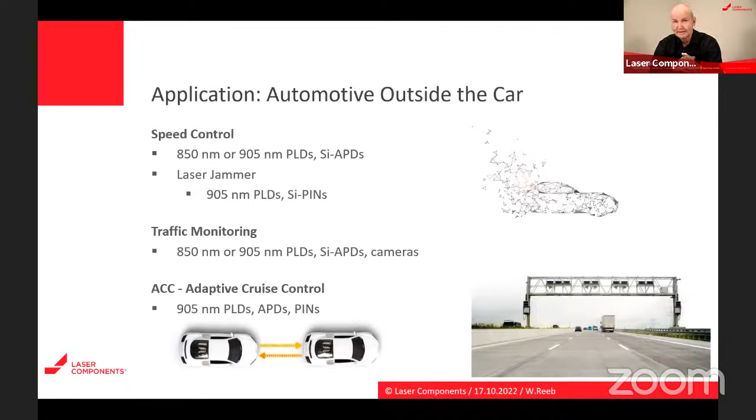If we look into a car, we see that there are many different sensors and technologies, because unfortunately there's no perfect sensor that optimally performs all measuring tasks. Cameras, for example, are good for color vision, identifying other road users, lane markers, and traffic signs.

Ultrasonic is used for parking assistance and short distance measurements. Radar is used for speed and obstacle detection. And LiDAR has 3D capability and the ability to function in unfavorable weather conditions like darkness, a big difference from cameras.

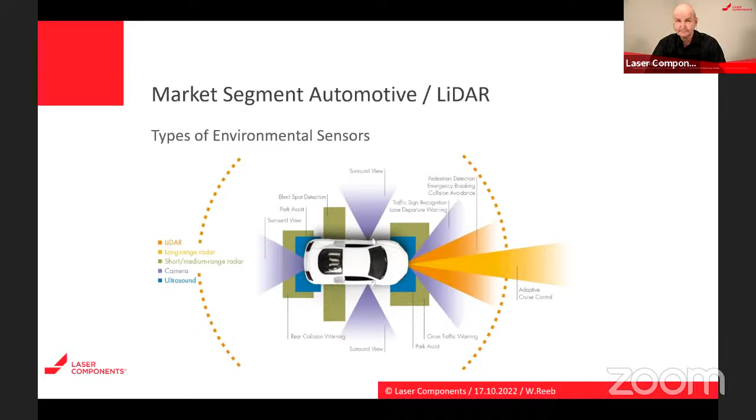Solid-state LiDAR is a code name to describe LiDAR which are not using conventional motors, but semiconductor solutions to scan or steer light through a scene. The emitter and the detector are essentially the same, but the rotating mirror gets replaced by a MEMS.

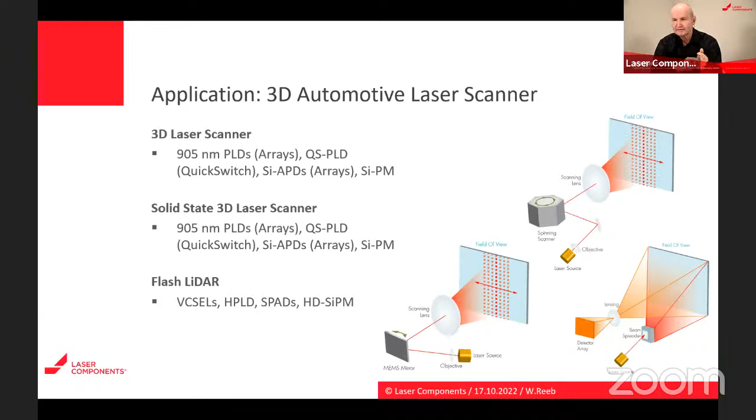Flash LiDAR is different. It illuminates the entire field of view at once, and the photodetector array captures the return of the entire field of view at once. So flash is mechanically and optically simple, and potentially cheaper as there is no need for a beam steering mechanism, but the requirements for the emitter and detectors are more demanding.

Okay, I have to speed up.

Other applications: the head-up display, for example, is an augmented reality display that provides a safe driving environment by showing information derived from vehicle sensor data.

Anti-fatigue driving detection system: it's a matter of traffic safety, preventing drivers from drowsiness. It's a kind of driver monitoring system based on facial 3D imaging recognition and movement detection, such as eye closing.

Laser headlight: on the topic of continuous improvement in the automotive industry, headlight technologies from halogen, xenon, and LEDs to now doubtless laser is one of the favorites to improve energy conversion, efficiency, and brightness.

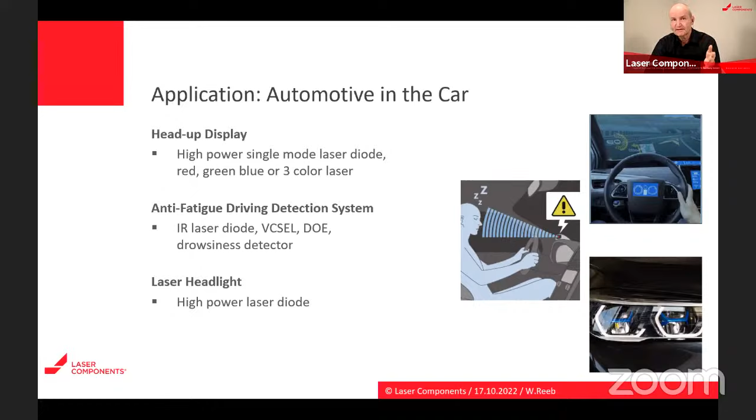Air quality monitoring system: the so-called PM2.5 sensor uses laser scattering to detect suspended particles in the air. Maybe the next step could be air purification using UVC LEDs in the future.

Laser indicator or anti-collision brake warning light. An anti-collision brake warning light increases visibility at the rear end of the vehicle, warning following drivers not to get too close so that traffic accidents can be avoided.

Finally, the Rolls-Royce star roof. I have no picture here, so you really have to Google it. Looks fantastic, but it's more likely Photonics entertainment in the car.

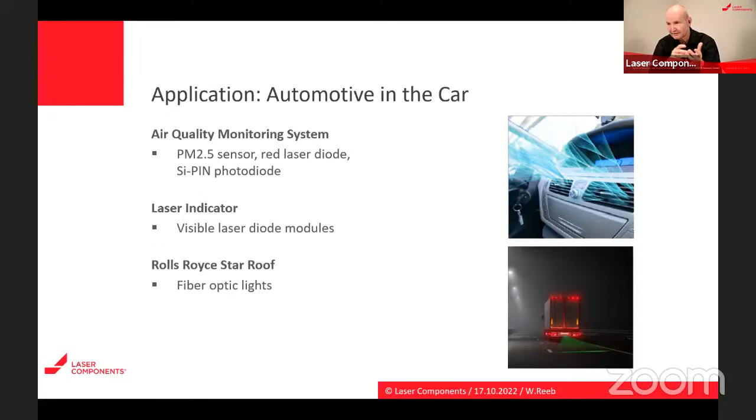So I'll do a very short summary. Photonics already plays an important role in mobility and will definitely play more in the future. Even if there are some nice-to-have applications, Photonics is indispensable for safety and health reasons. LiDAR sensors are important for safety and, in the future, for autonomous driving.

If you have any questions offline after this event, please contact me directly. Otherwise, thank you for your attention. I hope I made it just in time, Antonio.

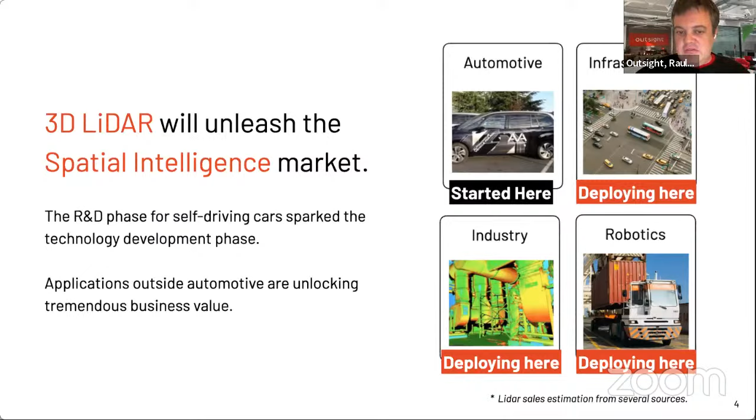The problem with all these industries, unlike the self-driving car, is that it's very complex for normal engineers to use LiDAR data. There are many reasons for that - I'm not getting into detail on each one, but there are many aspects to the complexity for a normal engineer to use LiDAR. For example, you cannot really use image processing techniques for LiDAR, it's a very different kind of data. There is no standard - there are almost 80 different manufacturers of LiDAR, and each one is using their own solution. It's really what is today preventing deployment at scale, not the price and performance anymore.

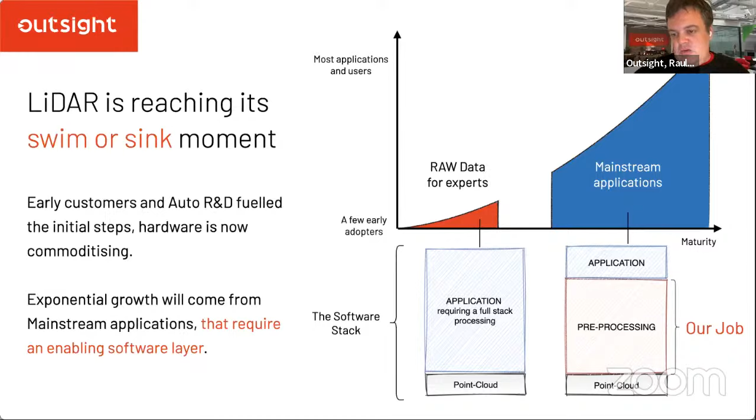So that's what we are doing - helping the market evolve from an early stage phase where everyone was doing everything, to the mainstream situation where there is hardware, but also specific software that helps build applications very easily. This is what we are doing, making it very easy to build applications from LiDAR. That means 3 things. First, we are abstracting the complexity of the hardware, combining different heterogeneous situations and manufacturers and bringing a standard output. Second, we are processing this data, doing the heavy lifting - object detection, tracking, SLAM, volume computation, etc. And third, as a consequence of the previous one, the narrowband output is something you can easily use in any application compared to the raw data, which is a massive amount of 3D data that is hard to process.

For example, in an airport situation, these are the steps you need to do, at least, to get to this point. First, making clustering and segmentation of the objects, tracking them, and then providing a higher abstraction level. If you are asking a customer to go from the bottom, which is the point cloud, and build their top abstracted situation, which is a dashboard, you can see there are many steps that only some customers are able and willing to do, whereas the value of the 3D data is becoming more and more obvious for many people.

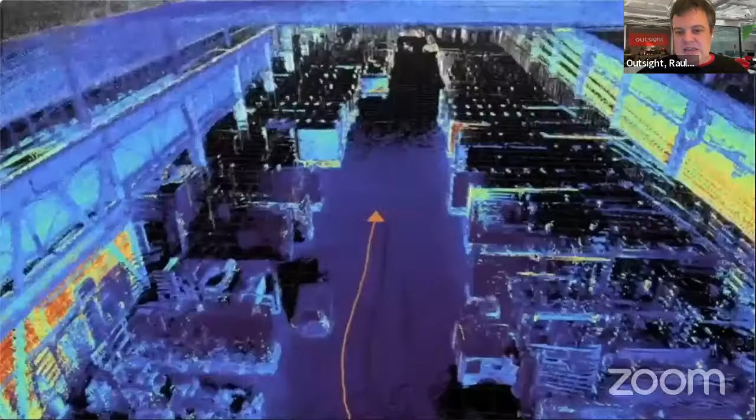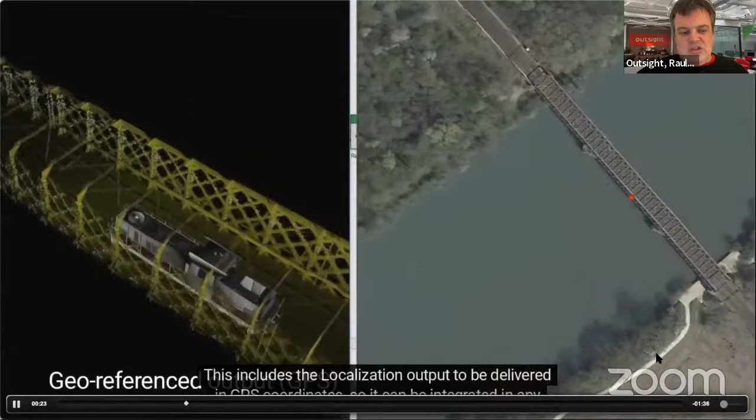So this is an illustration of what we mean. This is raw data, and this is already processed data in real time. Remember, this is done at the same time that the data is acquired, at some 20 Hertz, more or less. And this gives you a quick overview of the main features, which are localization and mapping, fusing with GPS data or similar, so you can integrate with other platforms such as Google.

Perception and object tracking, including static and moving objects. You can use this for different use cases, of course automotive and self-driving cars, but there are many other use cases like speed law enforcement, city inventory, and many other situations where you would like to have not only a map, but also a dynamic understanding.

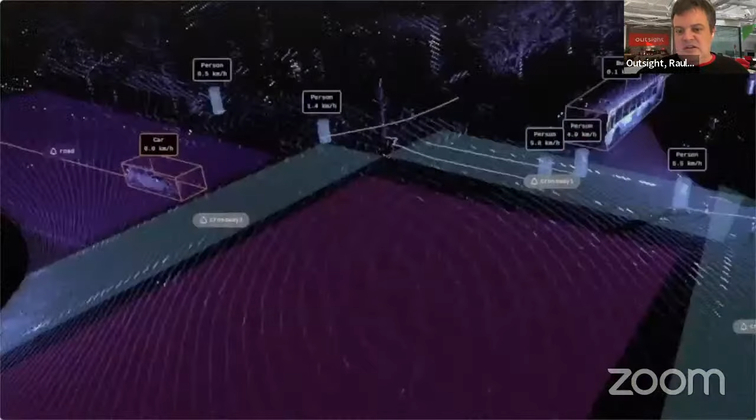A very powerful and strong trend we are seeing is smart cities and intelligent intersections, where we are tracking bicycles, pedestrians, vehicles, and detecting events like near misses. That means accidents that have not happened, but almost.

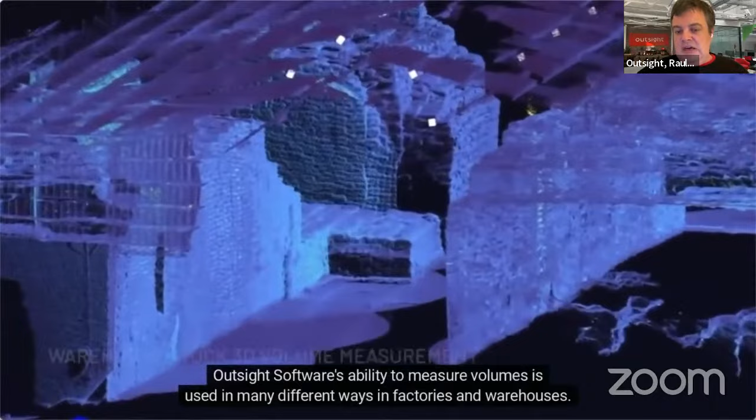Here, tracking people for passport control, for security applications, for many other reasons. Another application which is different is volume measurement in warehouses. In that case, we are fusing the information from many different LiDARs to get a real-time understanding of the volume of stock in the warehouse.

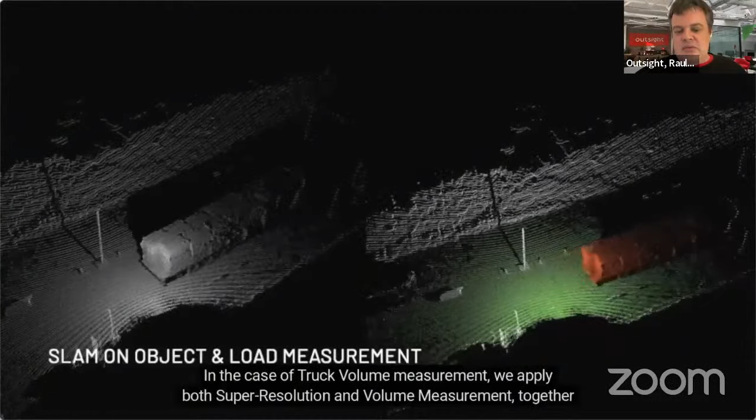That was a static situation. A dynamic situation is that the stock is on a truck, so we are making the segmentation of the load against the truck itself, because of course you want to measure the load and not the truck. So that's a good quick overview.

Of course, if we are doing that it's because we are using the best LiDARs depending on the situation. So we have agreements with more or less 80% of the market, because each LiDAR is a good fit depending on the context and the use case. There is no perfect LiDAR, and there is no useless LiDAR either. There are many niche applications, many different situations where each hardware has more or less advantages and disadvantages.

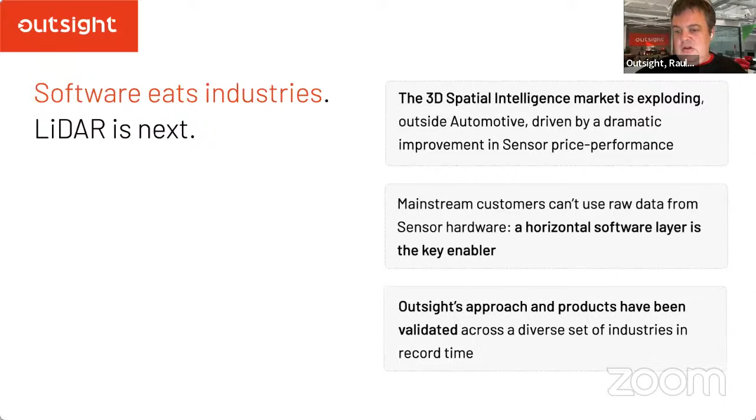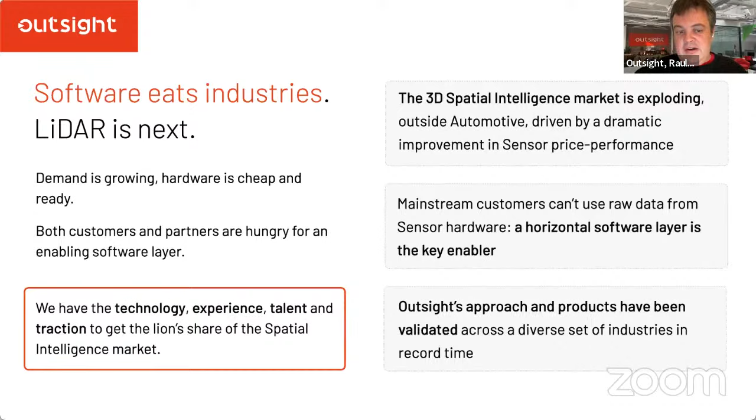So that's what I wanted to show you, opening your eyes that the software era of LiDAR is starting, and it is the key enabler, not for LiDAR. No one really cares about LiDAR or 3D. What they want is the value of 3D data. And of course, most of the users are not experts. That's our job. We have been doing that for many, many years, because we are convinced of the value for society to make a safer and smarter world with LiDAR and the right software, of course. Thank you.

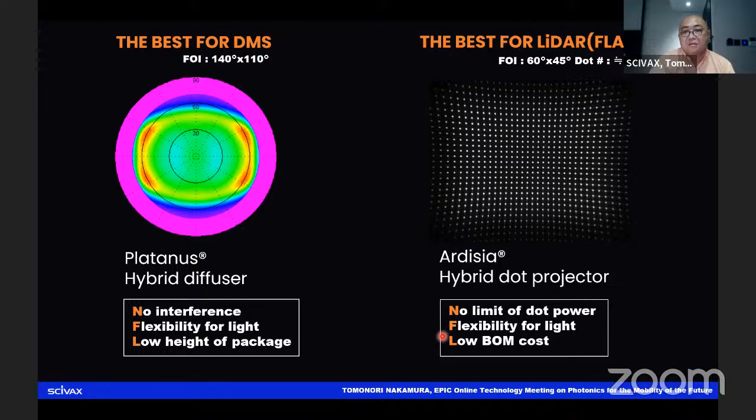Okay, I will show you the experimental results for DMS and the LiDARs. This is in-cabin rear mirror position DMS results.

This point cloud is taken from a Melexis evaluation kit and SCIVAX Platanus module. As you can see, the point cloud is very fine and smooth, and covers a wide region between driver and passenger seat. Unfortunately, we cannot get the rear seat information.

I have one solution, so I will describe it later.

This is for lidar images. We took a 10-meter depth image using an Ardisia module and TOF system. The left picture shows the IR image, and the right picture is the calculated result from the IR image in a depth scale.

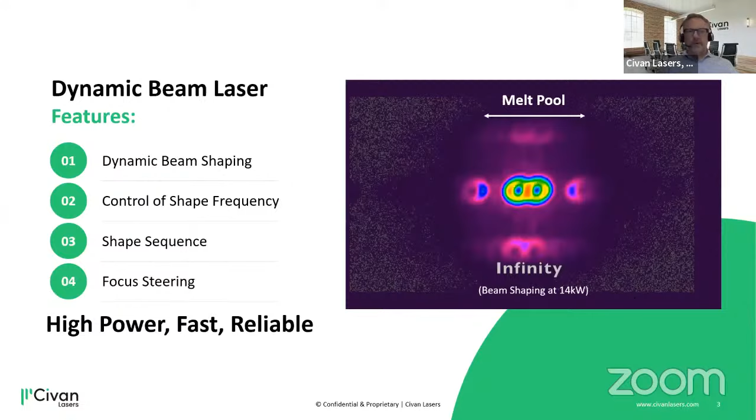So what are we bringing to the table? I already mentioned we can change the beam shape, and not only to given shapes, we can create literally any shape. We can change the frequency of that shape. And as this is working with megahertz speed, we can actually create a sequence.

So what that means is, instead of having one beam shape working being the best compromise you can find, we can have several beam shapes working, being the best solution for each individual issue that you might find in your welding application. I will point out a few welding application issues on the way.

Finally, we have also the ability to do focus steering. For instance, in the scanning application, we do not rely on an f-theta lens. We can do that, but what you will typically know as a 3-axis scanner, we do it electro-optically. So no moving parts, no wear, no tear. That's basically the idea of Civan Laser, what we are bringing new to the market that's not existing anywhere else in this configuration.

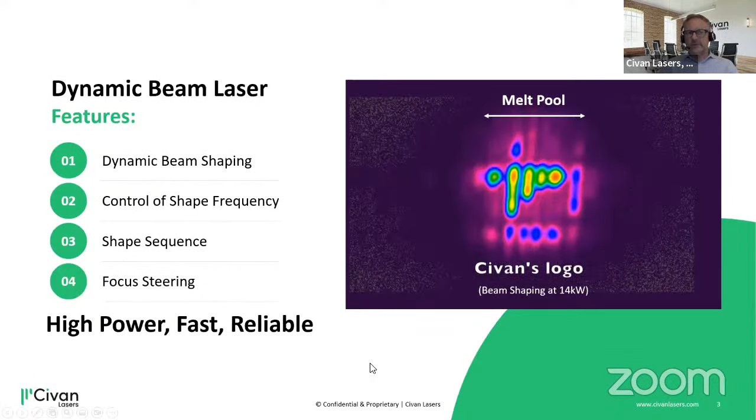And one of the beauties is all this freedom, these degrees of freedom you have, you do them digitally. You don't touch your beam delivery system, you don't touch your laser. All you do is create your beam shape, power distribution, whatever strategy, on a screen, and upload it to your laser and you're basically done.

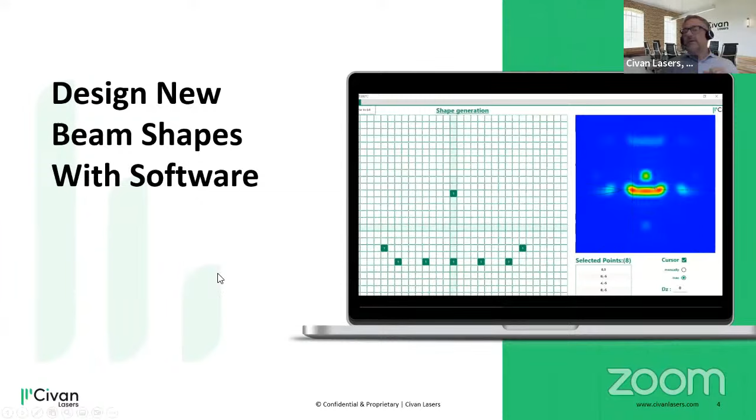And that gives you the ability to create a lot of different beam shapes. As you can see here, for instance, they don't have to be static. There can be an overlay of motion. These beam shapes can be rotational symmetric, but they can also be asymmetric. And you can, for instance, steer them around.

If you have curvatures, if you go around corners, then you can move them always around in order to meet the right direction of motion, the trajectory. So that's basically the freedom in terms of shapes.

Problems I mentioned before are typically humping. That means if you go fast, then your topography of the welding seam is getting unstable and you get humps. You can have cracks, and the last one is porosity.

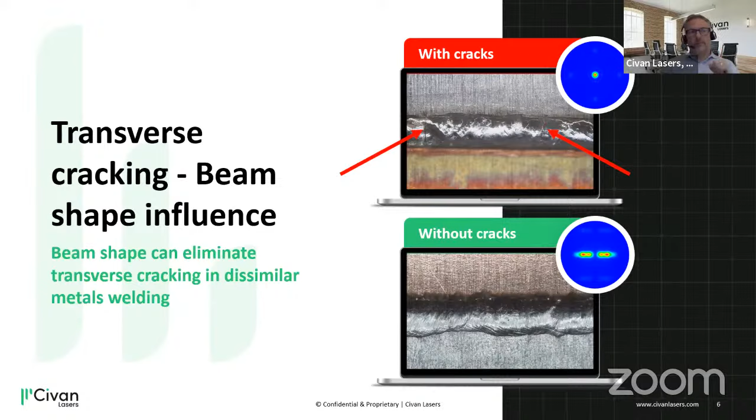And all that is basically driven by instabilities of the keyhole and the melt pool. That's basically what we are all about. We are basically providing new means to manipulate the melt pool in terms of gradients, in terms of flow, and that's basically done mainly by controlling the keyhole.

You can put a shape to the keyhole. You need to keep it open, and then you basically have the shape we already discussed. And the other factor that's a huge leverage in terms of welding quality is the frequency of that shape.

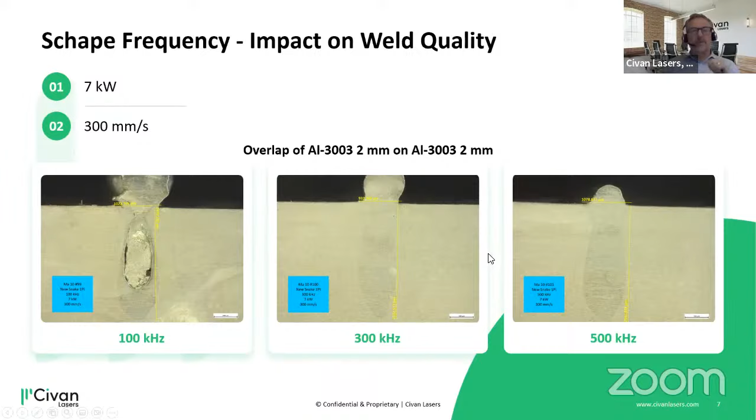So we have the shape and we have the frequency, both very relevant parameters that you can manipulate. And since, again, we're doing this at megahertz, we can create a series of different beam shapes addressing each individual problem. Because porosity typically is something where you want to steer the melt pool, to keep the keyhole open.

Humping is a periodic syndrome, so you want to disturb the periodicity of it. Hot cracking is typically an issue of thermal gradients, so you would use a flat thermal profile across the weld section in order to avoid cracks.

Switching with megahertz, we're able to apply all strategies at once. Just an example, if you weld with 30 meters per minute or 500 millimeters per second, you have about 1 millisecond at a particular place at the weld. So within this 1 millisecond, we can apply several beam shapes and address all the issues.

And we do that without moving parts, because if we would come to moving parts, the frequencies typically applied today for moving the beam are in the low kilohertz range. So we compare low kilohertz range of moving an entire beam to megahertz range of moving the energy distribution inside the beam.

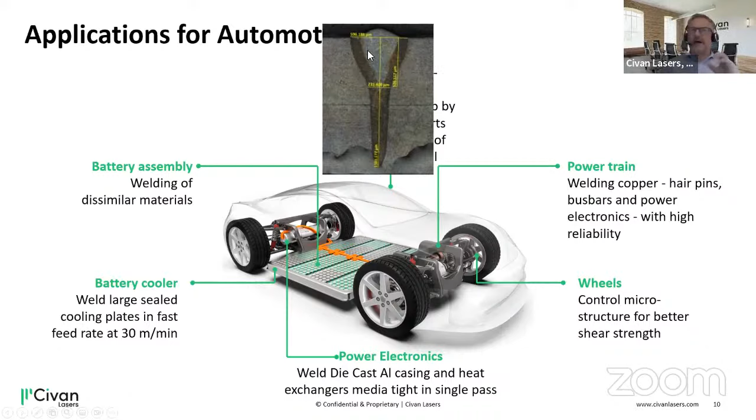Since we mentioned this as opportunities in e-mobility, it starts with the blank sheet of metal. If you have applications like coated steel, for instance, tailored blanks for hot formed parts, you can weld them directly without grinding down the aluminum silicon coating. Obviously this isn't the result you want, but typically what you want is a totally homogeneous mixture where you won't see anything. So this is our proof that we have control over the weld.

Next one is copper. This, for instance, is an example of 2 times 3 millimeter copper. Copper welding is obviously hairpins, bus bars, but also power electronics. And there, for instance, you really rely on not having spatter. If you have spatter in your power electronics, that's obviously the last thing you want, having loose little copper particles flying around in high power electronics. So controlling the melt pool is the key to having no spatter.

Another application, also aluminum wheels here. This is a steel part, but it's a project we made with a steel rim company. And because of the beam size, the beam caustic - this is a single mode laser beam - we have a very long Rayleigh range, so we were able to apply the beam directly vertical here.

So this is 2 parts fitted together. What you typically would do is go from an angle in order to not hit one of these 2 sides, and what that gives you is a short weld seam. But with this caustic and the way to manipulate the beam, we were able to do it directly parallel to the left part, following the connecting surfaces of the 2 parts, providing a much deeper and much stronger weld.

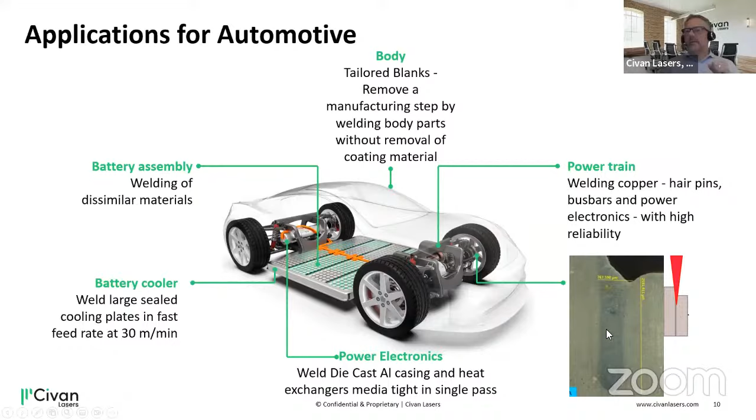Next one, which I think is one of the highlights, is the welding of die-cast aluminum. Die-cast aluminum is a material that's really everywhere - for example, heat exchangers or the housings of power electronics in inverters are made from die-cast aluminum. The problem is they get sealed when everything's built in, and then you want them to be gas and water and liquid sealed. The real problem is the H2 that's trapped in the material itself, so typically you get a lot of porosity.

So some strategies are to weld it twice. First time, basically get the parts together. Second time, remove the trapped hydrogen. But that second round is time consuming and prone to hot cracking again.

With our control over the melt pool, we can achieve a very high rate of outgassing, allowing the trapped hydrogen to really get out of the material and only leave this. So the key benchmark is porosity below 3% of the surface, and that's very difficult to achieve today with regular lasers. We have a real edge with our technology here.

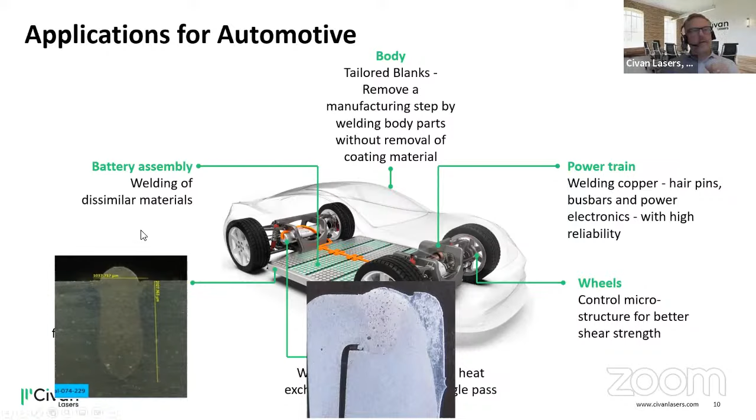This is relevant when you think about welding bus bars to batteries, where you have dissimilar materials. What you don't want is intermetallic mixing, because that is prone to cracks, and we want these joints to last long, because if this is the battery and the bus bar, then this is basically the performance or durability of your car. So that's another area where you have much better leverage on the design and quality of the weld joint when you manipulate and control the beam the way we do.

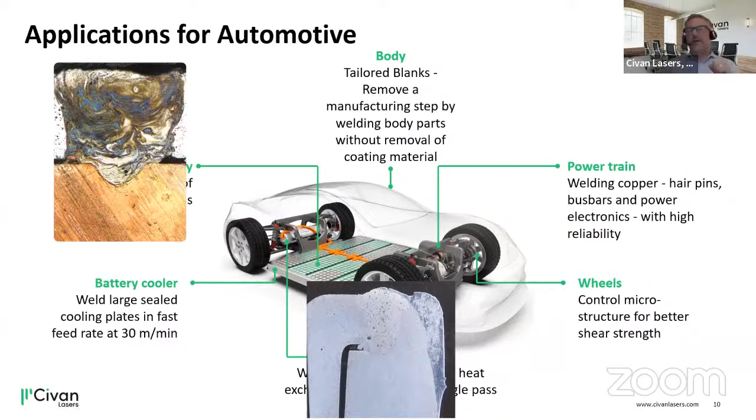So that's basically what I wanted to rush you through, sorry for the speed. Key takeaway is the dynamic beam laser enables you to control the melt pool, the keyhole, so that you have control over thermal gradients and flow dynamics. That's a direct control mechanism here, and that enables us to weld at higher speeds.

We can weld crack-sensitive materials, something like 6000 series aluminum, for instance. We achieve deeper penetration welding in air, so in atmosphere. With dissimilar coated materials, you have a parameter you can directly influence to control the mixing or non-mixing of the two dissimilar materials. And finally, die-cast aluminum, which today is at best weldable with a lot of compromise, but with control of the outgassing, this is a big improvement as well.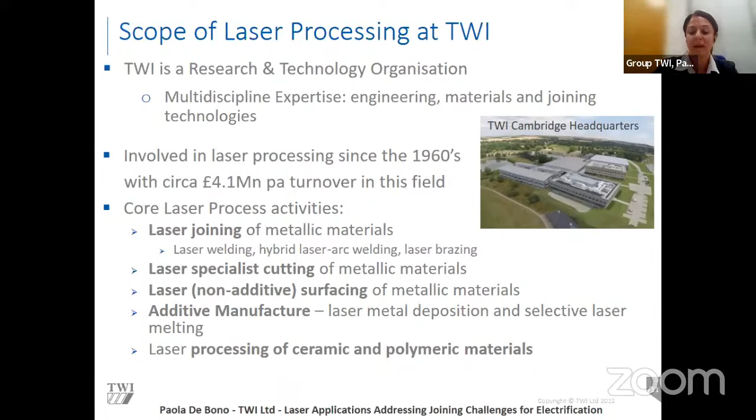So in terms of core areas we cover, obviously there is the laser joining side: autogenous welding, hybrid, laser brazing, but also laser cutting, looking at high precision cutting, with a big focus on decommissioning applications for nuclear and oil and gas industry. Then laser surface engineering, looking at laser cleaning, micromachining, laser hardening. So maybe for another talk, some of these laser surface engineering applications might also be a good fit to address some EV challenges. And then also additive manufacture, powder and wire based technology. We focus obviously on metallic material, but also ceramic, polymeric material, dissimilar metals, dissimilar joining in general.

So going to the topic of this talk, there are the three main types of battery cells typically used for battery modules and battery packs, and TWI has been involved in several activities looking at these three different types of cells. But if we look at joining challenges, there is the production side of things: how a good quality weld is achieved across the full battery module and battery pack, and in terms of electrical performance, how you can achieve a high localized heat input. And also there is often a need for dissimilar material joining.

Looking at another challenge, the thermal cooling is another aspect that needs to be taken into account to prevent any thermal runaway or battery packs catching fire. So looking at how to address those challenges, and obviously the weight aspect—how you could design the battery pack, which material to involve, which technology can be involved in order to reduce weight. We talk a lot about electrification for automotive, but we should always remember it's not just limited to automotive. There's a big focus also for aerospace application and much wider application across various industry sectors.

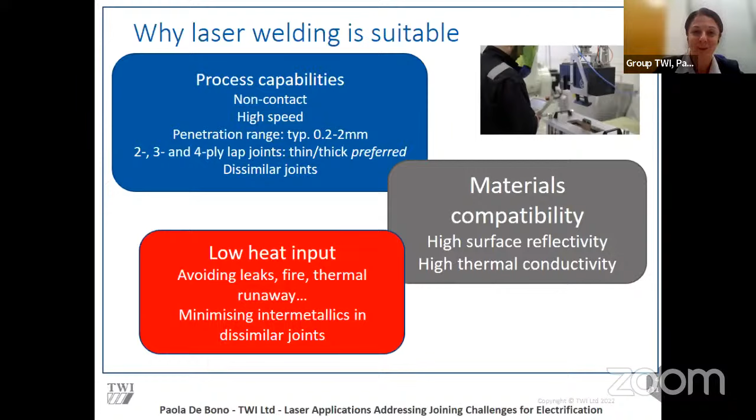So then moving to lasers, why it is suitable and attractive to address some of the EV joining challenges. It's a very flexible process, non-contact, highly suitable for volume production, but also capable of covering a range of materials and thicknesses typically considered within EV application. Also the flexibility on processing a range of materials, being capable of coping with challenges that reflective metals like copper and aluminum typically present, and the high localized beam, the possibility to reach very small beam spot size, and the scanning technique that has helped to control intermetallic phases, brittle intermetallics, for example in dissimilar joints. So a lot of aspects that lead us to consider a laser for this application.

These slides capture just two main types of joints typically encountered in battery modules and battery packs. There's the busbar to terminal joints, depending on the type of cell—cylindrical, prismatic, pouch cell. The thicknesses and material involved slightly change, offering different types of challenges, and there are several approaches that can be taken into account: concentrated infrared beam using scanning approaches with a wobble head scanner technology, short pulse laser technology considered for material combinations that lead to intermetallics—a different approach to what fiber laser technology can cover using high frequency short pulse interlocking mechanism. And then there are the more conduction mode beams, the emerging blue laser technology.

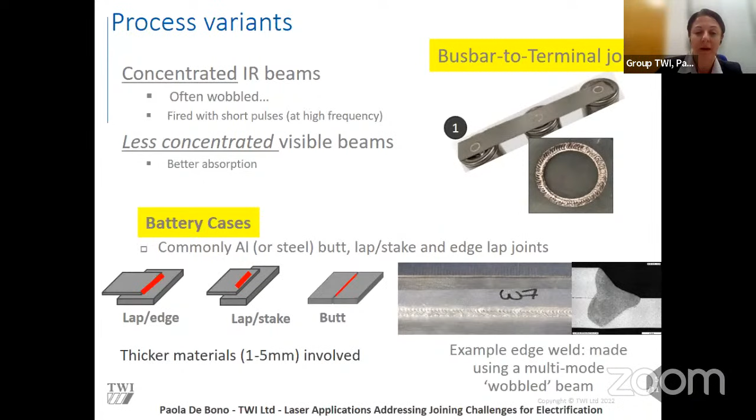Obviously we come across the green laser. Also Christian earlier was talking in his interesting presentation about dynamic beam laser. There are also the ring mode laser beams. So there is a range of options available trying to address some of the joining challenges for EV application. And also we shouldn't forget about the battery cases—typical materials are aluminum, steel, different joint configurations, thickness ranges that vary from 1 to 5 millimeters, and in this case partially penetrated joints need to be achieved, and the use of a wobbling technique has helped, for example, to overcome some porosity challenges typically encountered for this type of joint.

So what else to consider for laser when joining for EV application? Definitely the temperature—there is chemistry within those battery cells, so it's important to control the heat input, avoiding going beyond the temperature threshold of those battery cells. The fixture design is very important too, making sure there is uniform contact across the full battery modules, so validating those fixtures during the scale up phase. And in this context, when developing parameters at coupon level, offline simulation has proved to be very helpful.

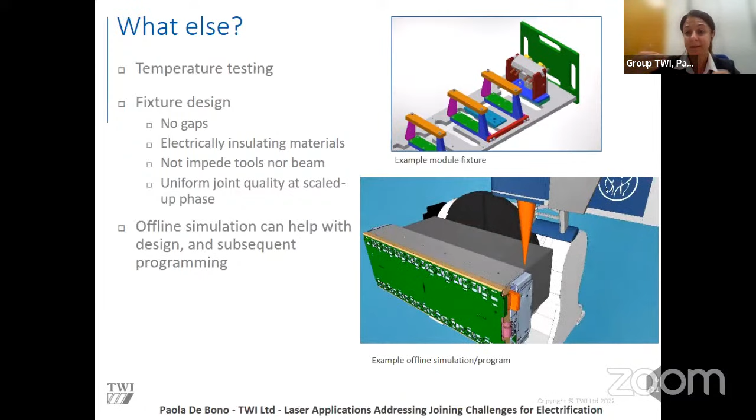So you can upload the design of the module, the design of the fixture, the laser cell, and identify at a very early stage if there are any constraints in the weld path in terms of access of the beam. So TWI has been working in these many different areas, supporting industry to solve some of the challenges during the scale-up stage.

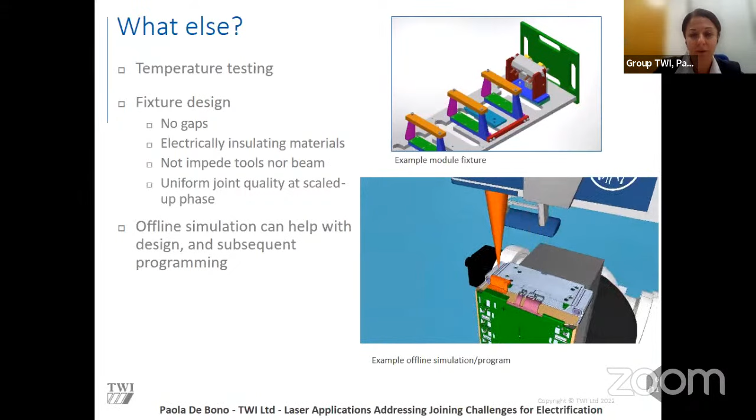Very briefly, we shouldn't forget about in-process monitoring. It's a very hot topic in general, not just for electrification, but has proved to be very important to actually helping to develop a robust process.

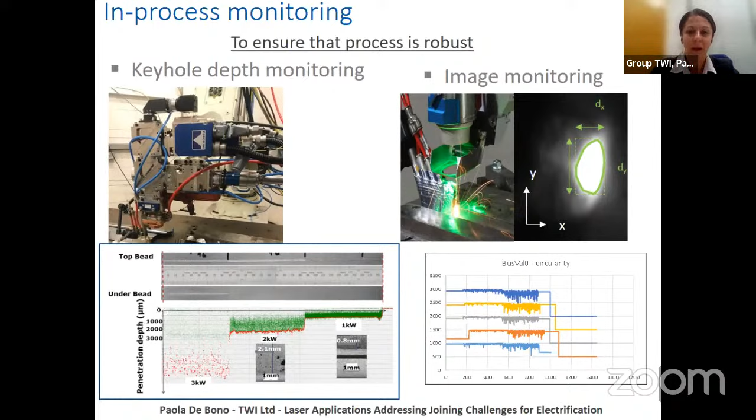There are keyhole depth monitoring devices like the Precitec IDM you might have come across, or the LDD from IPG, just as examples, able to measure the keyhole depth in line, in process. TWI has also been investigating image monitoring techniques looking at the stability of the keyhole, which is very helpful to reduce some post-welding inspection that may add time into the operation stages.

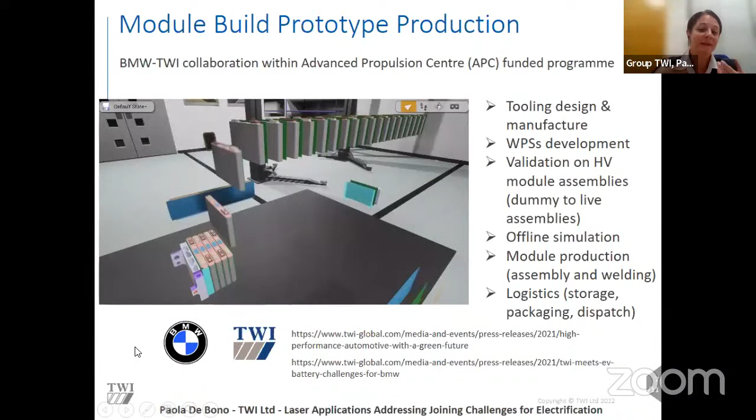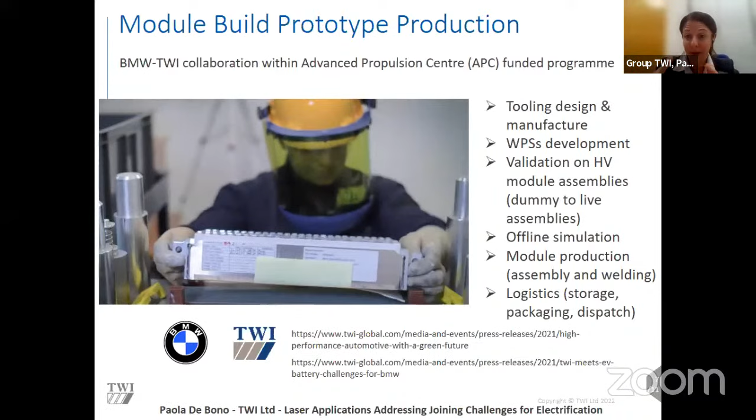And then in terms of some case studies, I'm just aware of the time. TWI has been involved in several collaborations. This is a case of a government funded program collaborating with BMW, where we've been involved in different stages, from the very early stages of tooling design and manufacture, contributing with our joining expertise applied to this challenging application, and then the scale up and assembly, and also the handling of high voltage cells, which is not trivial. Here there are some links - I believe these slides will be shared later if you'd like to find out more, and happy to take questions later.

This is also another example of an ongoing project, in this case funded by the European Commission, looking at the development of a smart battery technology with lightweight design. The project is called Albatross, where again TWI contributes with its welding expertise, so joint process development, validation, and scale up to demonstrate the technology at the battery module and battery pack stage.

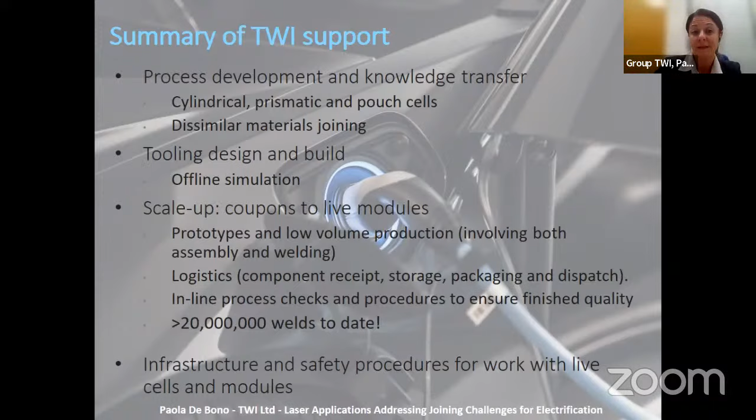So just to conclude, definitely in electrification there are many different challenges to actually achieve a sound joint. There are different factors contributing to achieving those sound joints, also depending on the type of battery cells involved. It's not just about the laser approaches that can help, but also considering the aspect of tooling and robust scale up. Going through all the different steps during the scale up is extremely important, and TWI will be happy to support this industry and keep contributing.

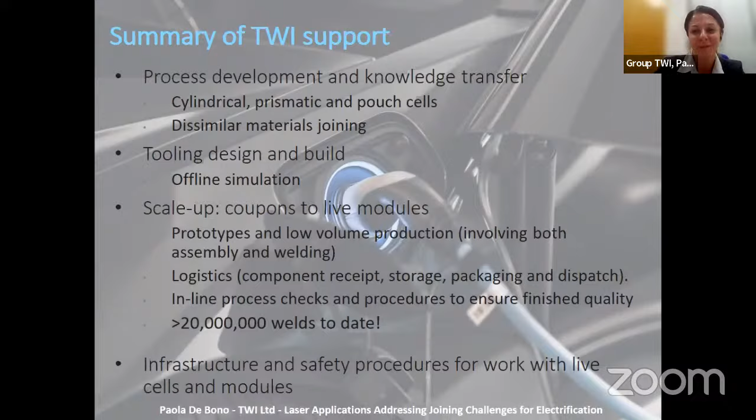I have one question. It's related to the short pulse procedure you mentioned. Do you think it's going to be feasible in the future, or is it going to remain reduced to some particular applications or niche applications?

Yes, so obviously the technology is quite interesting because it introduces a different mechanism of joining, for example, aluminum to steel, a combination that is attracting more and more interest. Introducing aluminum instead of copper, for example, to decrease the weight. I'm aware that, for example, Trumpf UK is working on a higher power system to actually overcome some of the throughput aspects, for example, to meet the volume production target. But definitely, we've been working also with Trumpf UK, and there are some interesting results there, and there is some good promise.

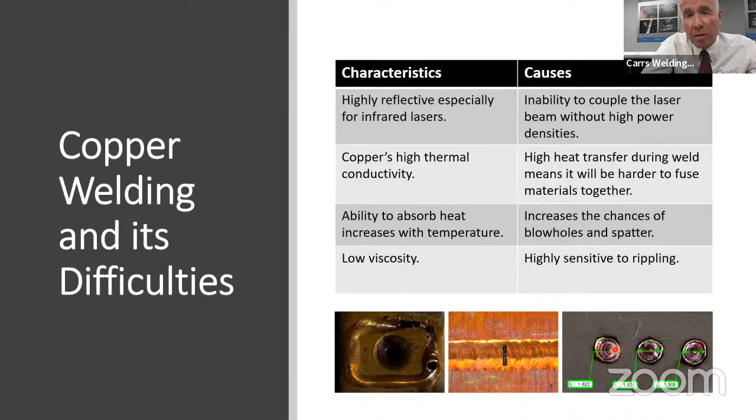We are doing it on some pre-production packs at the moment, interconnecting bus bar systems, and I just want to show you a few examples here.

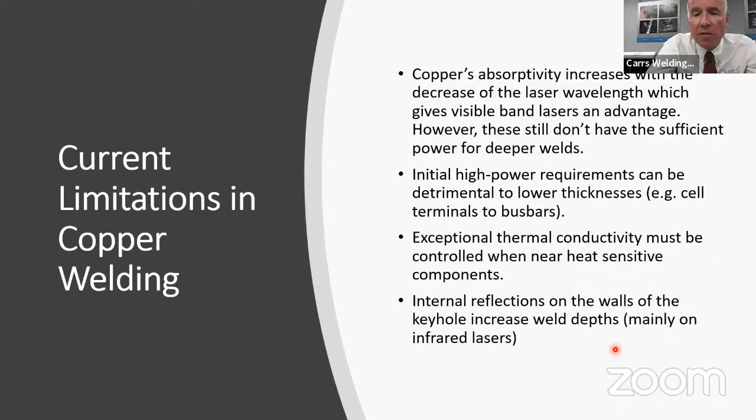The wobble welding, as they call it - we like to call it scanning - it's like a scanning weld beam across the width of the weld, and you can have various different shapes, but generally we use a circular shape in most things, sometimes linear straight. This basically allows you to control the depth and shape of the weld, and it's really nice in non-ferrous materials.

Basically it's just more controllability and repeatability when it comes to the welds. With some welds you want to do a preheat, post-heat, for dissimilar metals, and you can do that with an oscillating beam. The oscillating beam is hundreds of hertz, and it really gives you a nice looking weld as well as consistent high quality, and it's brilliant on copper.

Paola talked about it - you want a really high small spot, single mode if you can get it. We've got a multi-mode, but we've only got the 100 micron fiber here on our system, but it does beautiful welds up to 4 or 5 millimeters deep into copper. Really nice, consistent, low impedance.

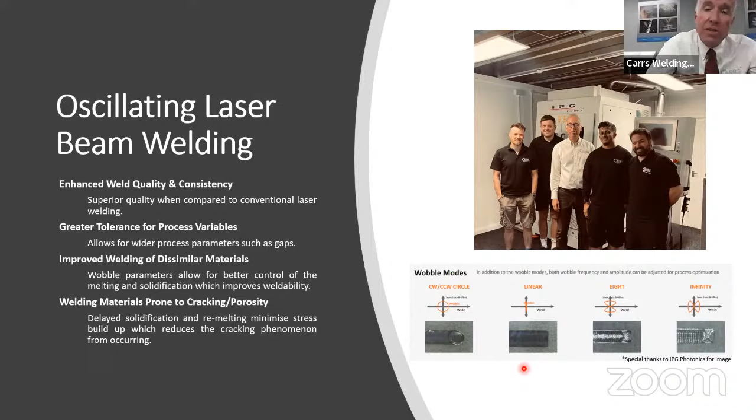And so we're working on a few projects in research - can I just talk about a few applications first? So this is very typical of the sort of thing you'd see in my shop today.

Just on the copper, on this circular weld here - as you can see, the weld gets bigger as we come around, as the preheat from the weld starts to put a bit of heat into the job, so it looks a bit bigger at the end. This is the end of the weld, we start here. That's actually 10 mil across, so it's only quite small, and it is copper, although it doesn't look like it.

It runs into copper, and that is the cross section - the two bits of material, a 2 mil thick bus bar system that we're making here. That gets too hot to be a cell weld, but it's really good connection for a bus bar interconnecting system.

These other applications, can I just talk about briefly - these are little modules. This top one here is cylindrical cells welded together with aluminium bus bars. That's quite a small module. They use quite a few modules to try and manage the heat.

Quite a lot of motorsport applications really use the power and energy, then dump it all back in and get very hot. So they have to manage it by keeping the modules quite small and sucking the heat out and trying to keep the energy right. They don't last very long.

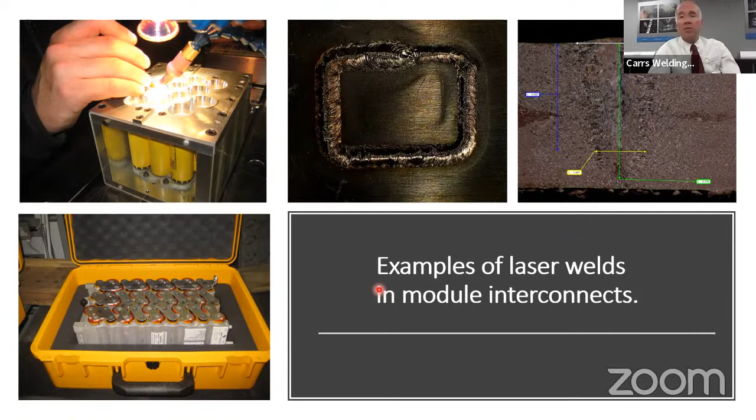That gives you an idea of what we do day-to-day. I don't know how much time I've got. A bit more time to talk about my research project. Have we got time, Antonio?

We have time, one minute. What I'd like to do is switch my screen over to this other slide. I don't know whether you want full screen mode. Sonic Laser - we were very lucky to win an Innovate project with help from TWI, introducing ultrasound into the metal we're welding. Phil, we're still on the previous presentation. Let's get back to that. We got that? Yeah, cool.

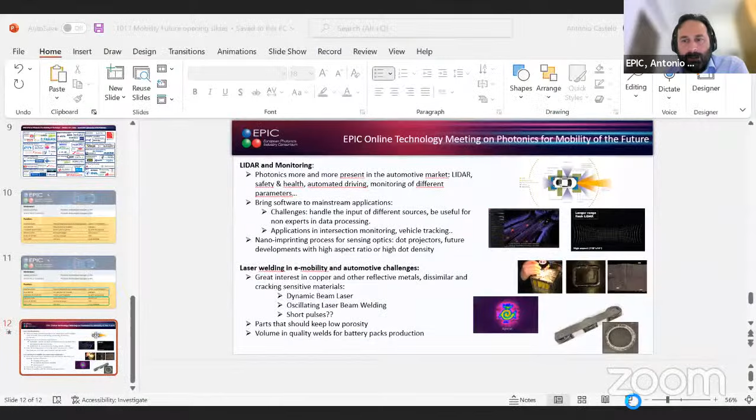So just as a summary of the things we discussed today, we had a presentation in 2 blocks, as we mentioned at the beginning. Regarding LiDAR and monitoring, we saw that photonics is more and more present in this automotive market. We heard about LiDAR, about safety, about automated driving, and monitoring of different parameters, even environmental parameters. We had a nice presentation about how to bring software to mainstream applications to solve the challenge of handling, on one side, the input of different sources, and also having a solution useful for non-experts in data processing. I was interested in applications like intersection monitoring and vehicle tracking, for example.

And the last presentation of this block, we heard how nano-imprinting process can be a solution for sensing optics. We saw some solutions for dot projectors, and we heard about future developments in high aspect ratio and high dot density components.

And in the second block, about laser welding in mobility in general, I saw great interest in copper and other reflective materials - that seems to be the trend for now. Also dissimilar material welding, and also cracking-sensitive materials. We saw the dynamic beam laser approach from Civan Lasers, the oscillating laser beam welding, both in TWI and also in Carrs Welding. Then Paola also mentioned short pulses preliminary results, which could be a solution in this kind of welding application. Civan also mentioned the parts that should keep low porosity as a challenge in this kind of application. And then Paola mentioned how it's important to keep the quality in volume in battery pack production - how to produce volume batteries with good quality welds.